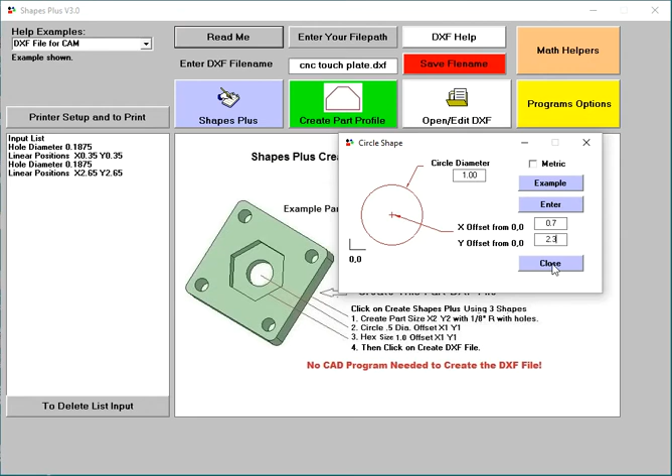Okay? So we're going to say the center distance on the hole is 0.7 and 2.3. Okay, close it. No, I didn't want to close it. Okay, there's another mistake here. Circle, so I go back and I have to do it over again. 0.7, 2.3, enter. Okay, close it now. Now if it isn't over here, it isn't entered. So what we got is two holes and a circle.

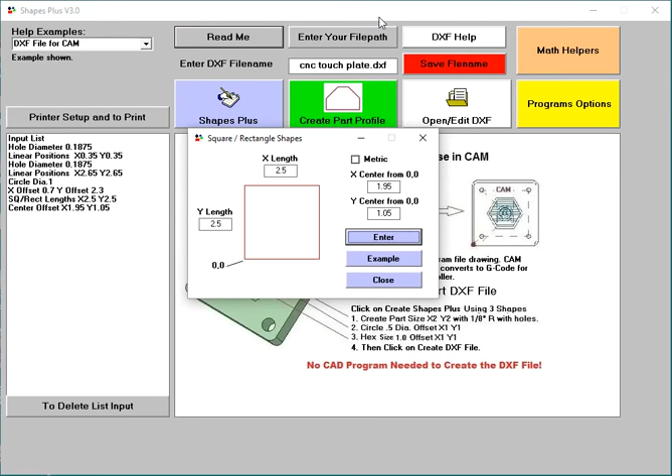Okay, next is the square pocket cutout. So we use square. I got 2.5. I have to be a little bigger, kind of an offset. I'll show you that later. Okay, and our center distance is 1.95 and 1.05. Okay, enter. Enter.

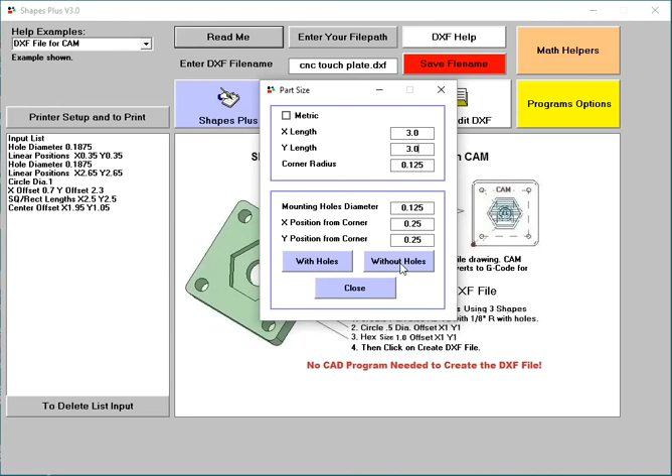Okay, the next is the part size. 3 inches, 3.0. Corner radius, yes, without holes. We're not going to have any holes, so none of this will be entered. Without holes. Okay, that's done. Okay, over here we should have 1, 2, 3, 4, 5. Okay, let's create the DXF. Okay.

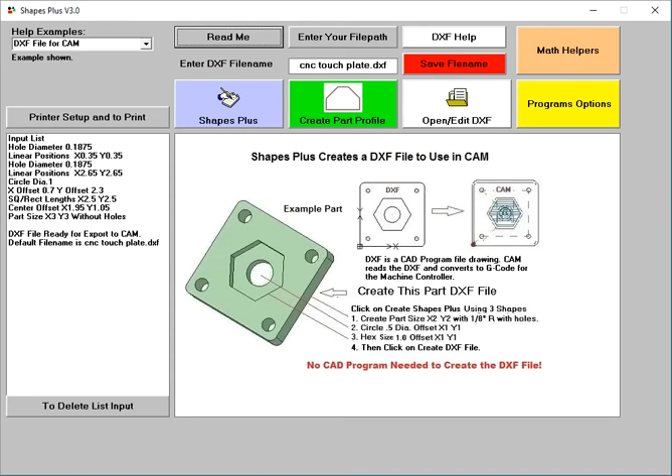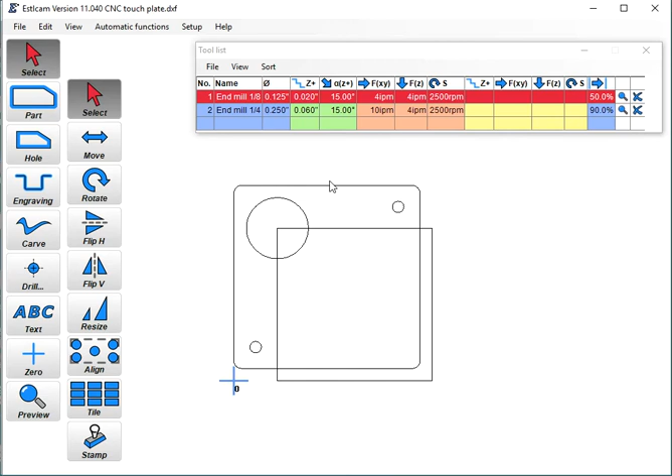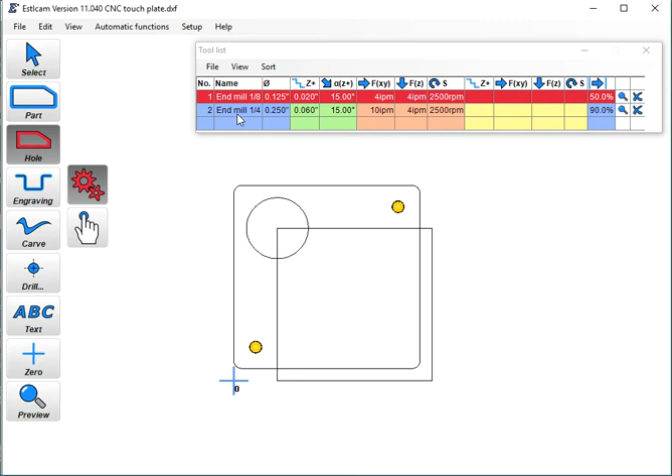There it is. Now this square here is going to get a pocket. This hole is going to be a pocket. Then we're going to do the profile. Now this is how you would do it. You would select drill. Select helical drill because the hole's bigger than my tool. And then you would select each hole. And then you would select the hole, change to 1/4 inch, because we're going to use a 1/4 inch cutter now for both of these. And then you would select that, pocket it.

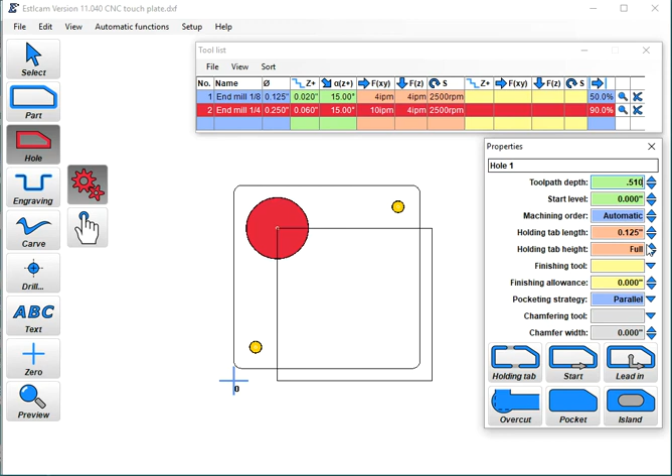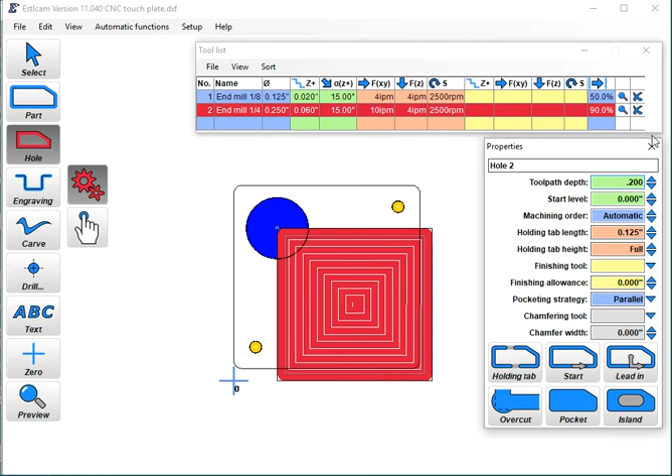You're going to use parallel, and we're going to use 1/2 inch stock, so the depth is going to be 0.510. Okay, I think that's it. Okay, next is going to be this one. We're going to pocket this one. Going to use parallel, and the depth is going to be 200 thousandths. Okay. Go.

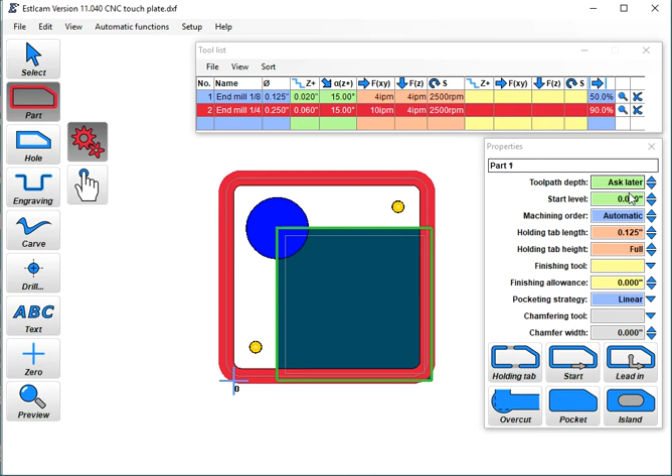Then we're going to do the part outline at, well, it'll come up, 0.510. Okay, that should be done. Now we can take a preview of it. 510, it asks you what the depth is. Okay, that's fine. Now you click on this, and if you want to go faster, you hit this one. Then you do that one.

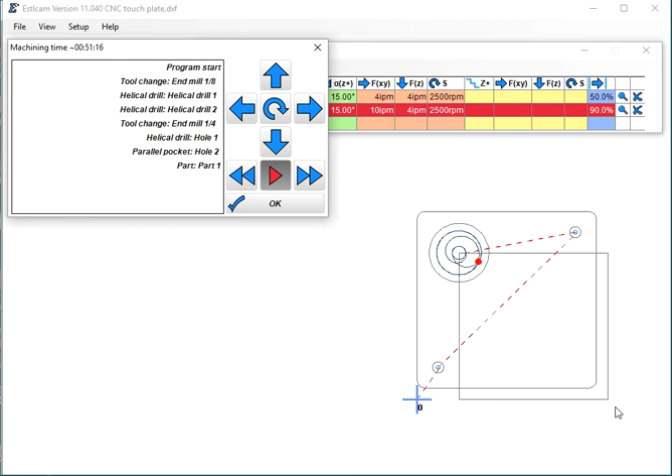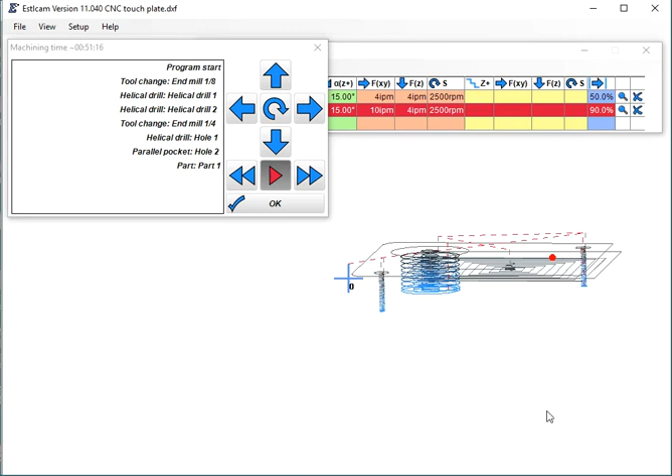Let's go a little faster. You can raise it up like this by the left button. Right button moves it. Center wheel makes it bigger. Now we're doing that. Well, we're down to our depth on both, what we see there, and this one should only go down 200 thousandths. Let's go a little faster. Looks like part is done.

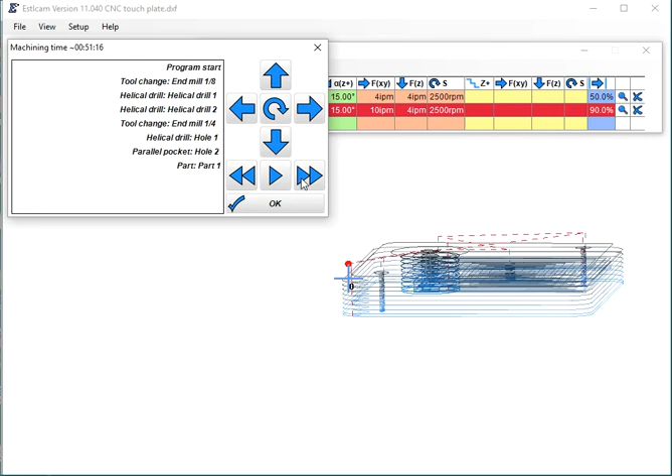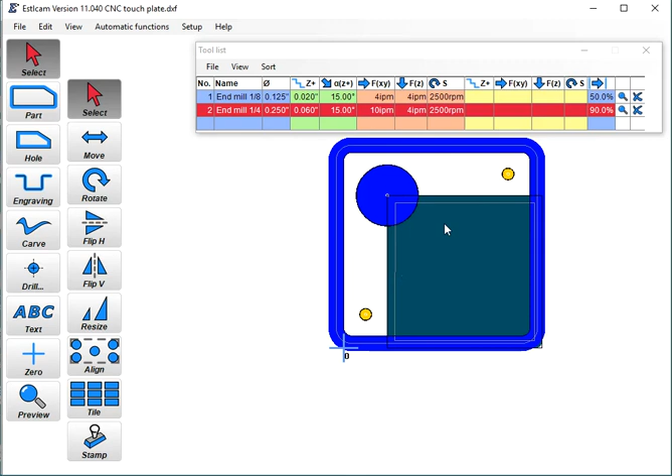Okay, if you wanted to overcut, you would do this. Say you want to overcut this by 20 thousandths to pocket, so that you know that you're going to be against the X and Y sides. Then you would go to hole and select the 1/8 end mill and hit that. And then you would say, I want to go down 0.520, and that would be it. Now you have that.